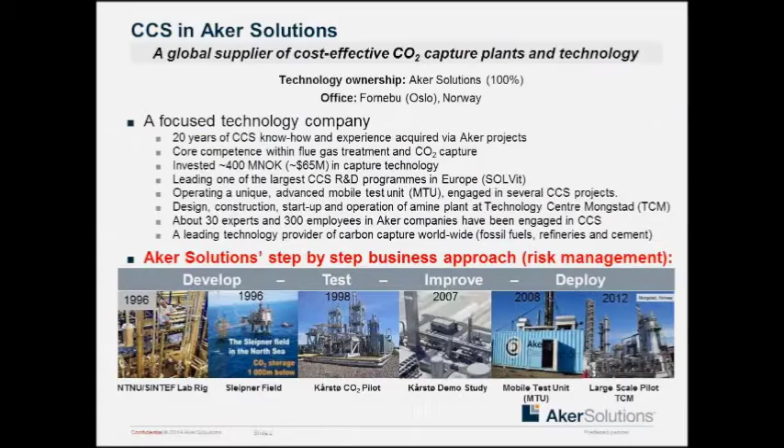First, a summary of our activities. We have been working with CCS in Aker for more than 20 years, and we have an extensive R&D program ongoing to test certain issues related to our post-combustion technology. We also have our own test facility, a mobile test unit operating, which I will come back to. In our company we have about 30 experts on flue gas handling and post-combustion technology. In Aker we have followed this step-by-step approach in order to handle risk.

We started early in 1996 with a small pilot in Trondheim at the university there. Then we did all the conceptual work and design and delivered the Sleipner platform for CO2 handling. Later in '98 we established a larger pilot working on a gas motor. Then in 2007 and 2008 we established a dedicated company for carbon capture, and the mobile test unit, as you can see, was started in 2008. And now we are testing our technology at Mongstad, the technology center in Norway.

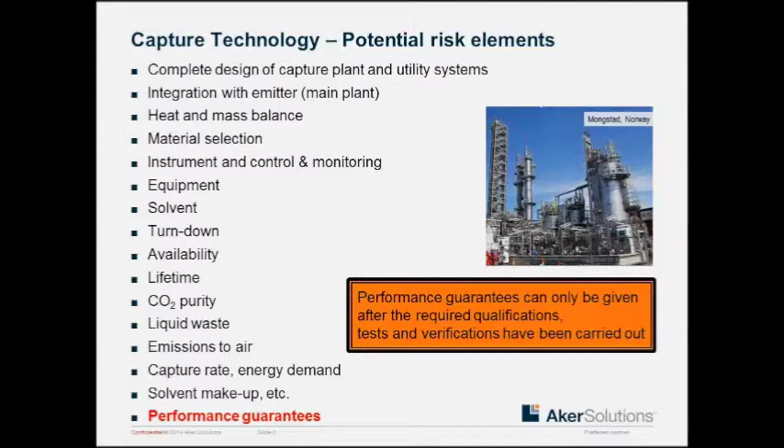To really understand the plant and give performance guarantees, you have to verify the technology and do tests before you can give any process guarantee. That is very important from a technology supplier's point of view.

If you look at the main challenges in the carbon capture plant, it's very much related to the amine solvents. Most technology companies are looking for improved solvents, and they have different behavior with respect to capture efficiency, energy demand, and especially degradation, which is very important if you have a challenging flue gas—then you need a very robust solvent.

Corrosion is very much related again to degradation and flue gas. We have also seen foaming in some systems and operations of the plant. Reclaiming is kind of a washing machine where you take impurities out of the main solvent loop and remove them as waste. Emission to air is also very much related to flue gas and the type of solvent you have.

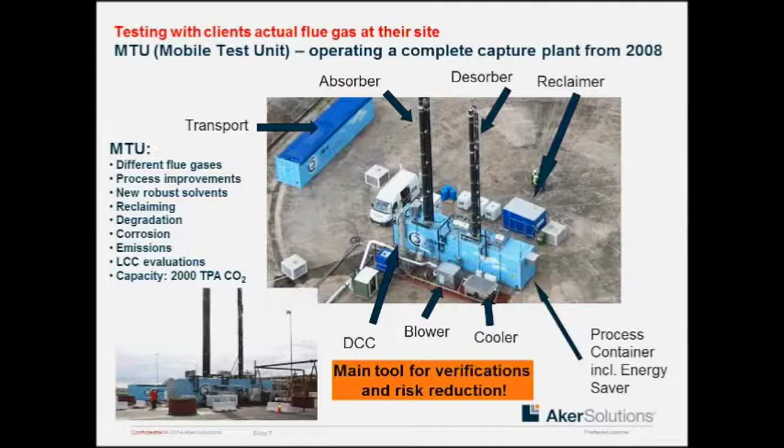You can also see a picture from Heilbronn in Germany, where we have cooperation with ENBW. Finally, the best candidates from these tests enter into Technology Center Mongstad, where we are operating the main plant now. The mobile test units are container-based, easy to move around, and it's a complete carbon capture plant that has been in operation since 2008.

It's very easy to modify, and it's used to verify the performance of the process. We use different solvents, and we can test materials in the plant.

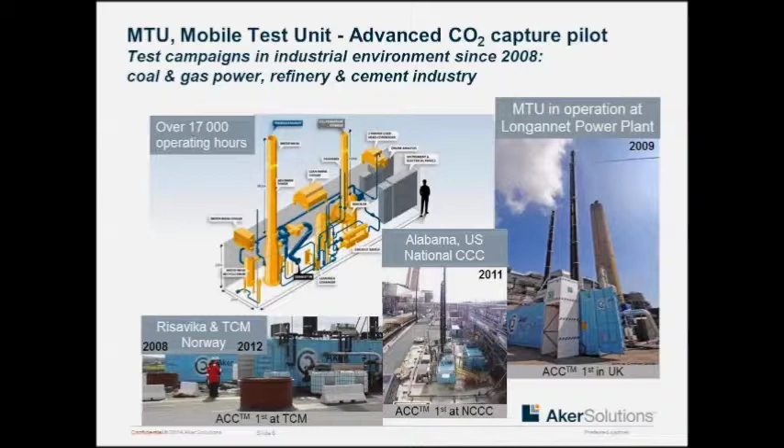This is just a summary of the MTU activities. It's been around in UK, Scotland, and in Alabama, US, and 2 different locations in Norway since 2008. We have different test results from coal-fired power station, gas power station, and at the moment we are testing on the cement factory here in Norway.

As you can see on this slide, we started up on the 1st of May, and we are now testing for the first time on the cement industry. The cement industry contributes about 5 to 6% of the CO2 emission globally, and the CO2 concentration is up to about 20%, so it's high. So it's a kind of low-hanging fruit.

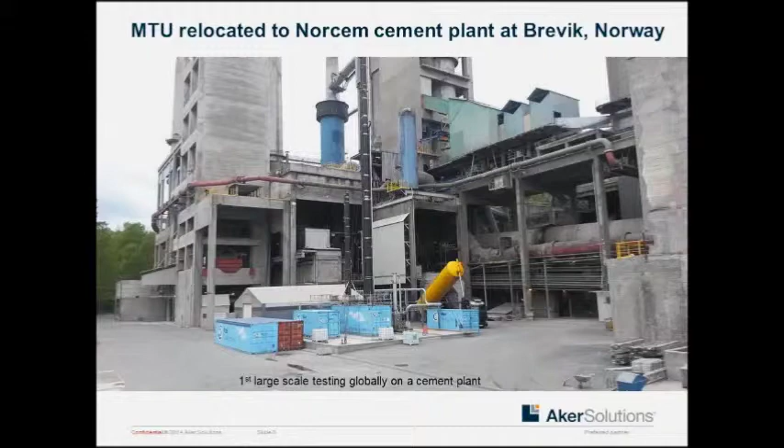But again, it's a different flue gas, different behavior, so it's very important to test on the actual flue gas. Just a summary of the plant at Mongstad.

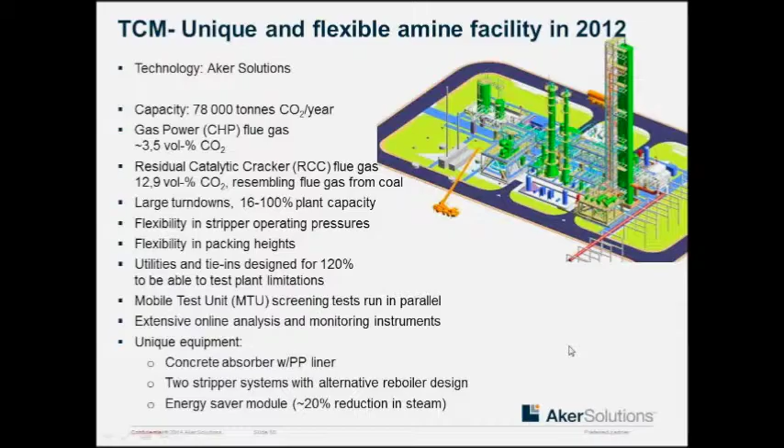Here you see a picture of it - the stripper column, and the absorber here, and you can see the mobile test unit operating in parallel.

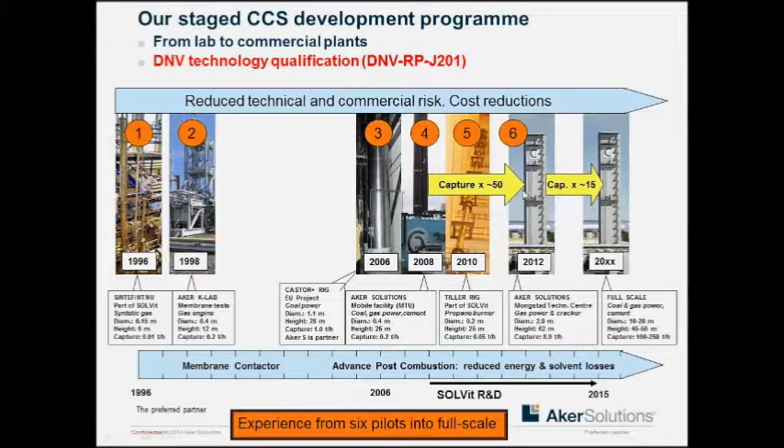Okay, thank you, Oscar. Now I'm going to talk about the procedure that helps manage technical risks in CO2 capture technology. In DNV GL, we call it technology qualification, and Oscar has already referred to that several times.

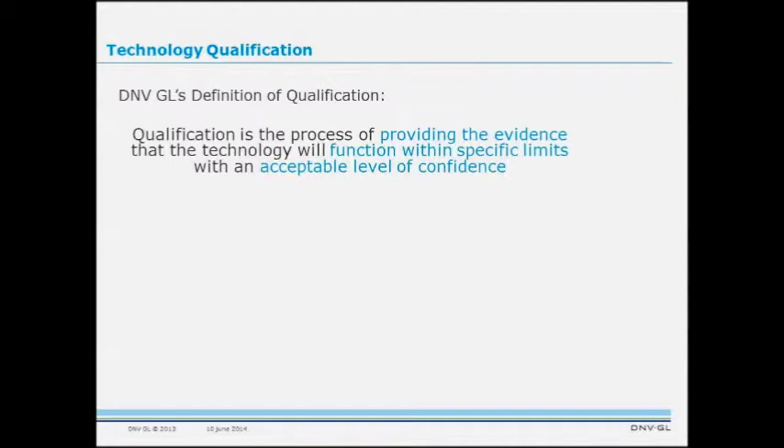Our definition of qualification is that it is the process of providing evidence that the technology will function within specific limits with an acceptable level of confidence. Our technology qualification process helps to increase confidence in the CO2 capture technology among different stakeholders.

Oscar has already mentioned several challenges associated with CO2 capture technologies, probably the biggest one being scale-up. There are also challenges related to equipment and materials, and integration of the CO2 capture plant with the emitter. Introducing new and unproven technology at commercial scale represents technical risks for different stakeholders.

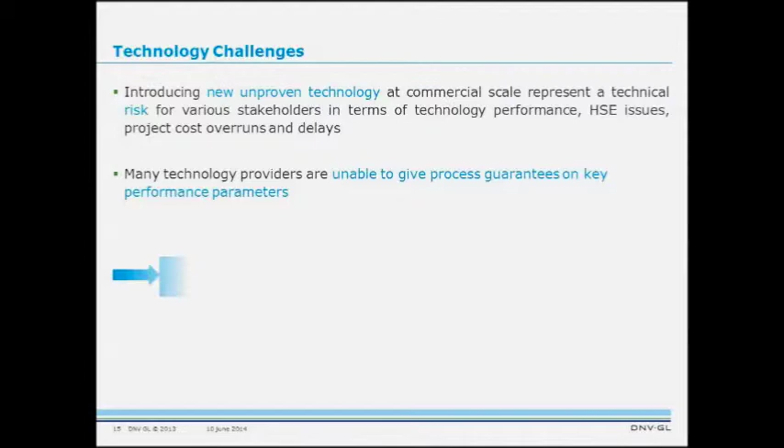Those risks can be related to technology performance, project costs, overruns, delays, and also HSE issues. Many technology providers are unable to give process guarantees on some key performance parameters. So DNV came up with a recommended practice, DNV RP J201, called Qualification Procedure for CO2 Capture Technology, issued in 2010.

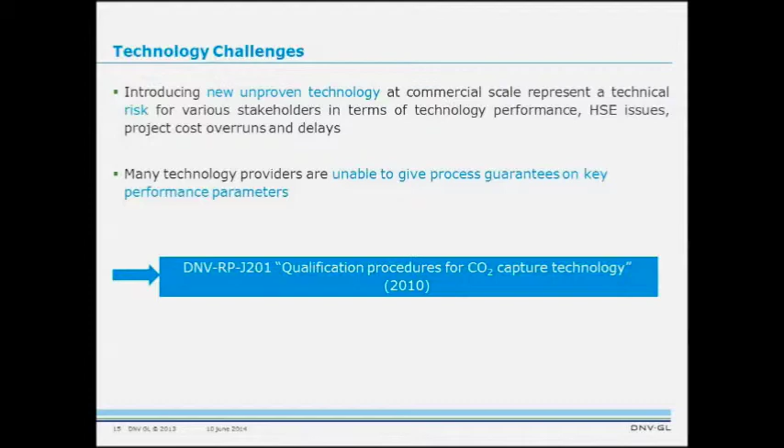Now I'm going to walk you through the steps of that qualification process. Here on the left you can see the DNV RP I referred to earlier, and on the right you can see the steps that the developer has to go through in order to qualify the technology. You can see the process is iterative, so it is possible to go back to the beginning and make modifications to ensure the technology will be successful in the end.

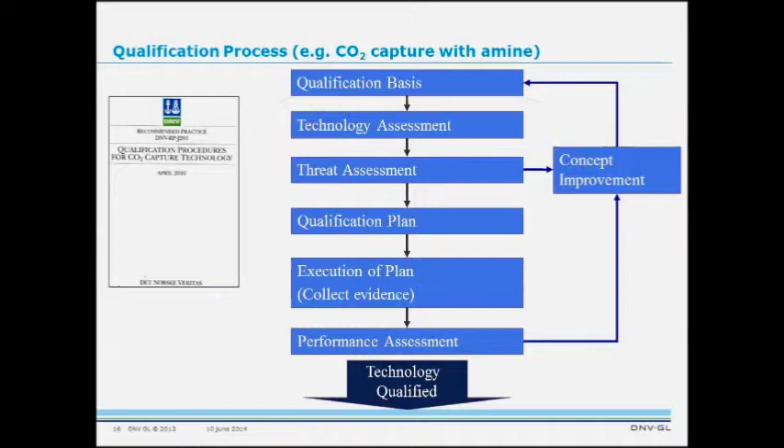The first process is the development of the qualification basis. Here the developer defines, for example, the boundary conditions of the technology and also the expectations for it — capture rate, emissions, energy penalty, reliability, and so on. So this is where the whole process starts.

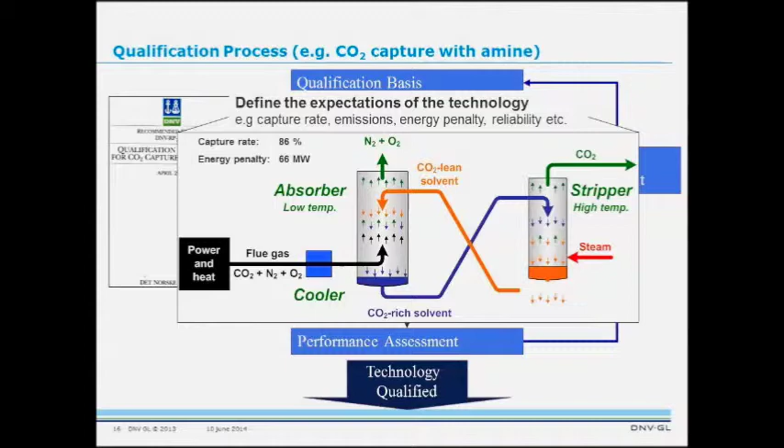After that, the next step is technology assessment. That is where the technology is divided into manageable elements, and these elements are rated in terms of novelty. You can see here the schematics of how we normally do that.

What we mean here is, for example, if you have a pump, and this is definitely proven technology, you would put it here — it is proven. But if you introduce it to a new environment, like putting it subsea or introducing a new liquid, then you would place it here, which makes this element novel.

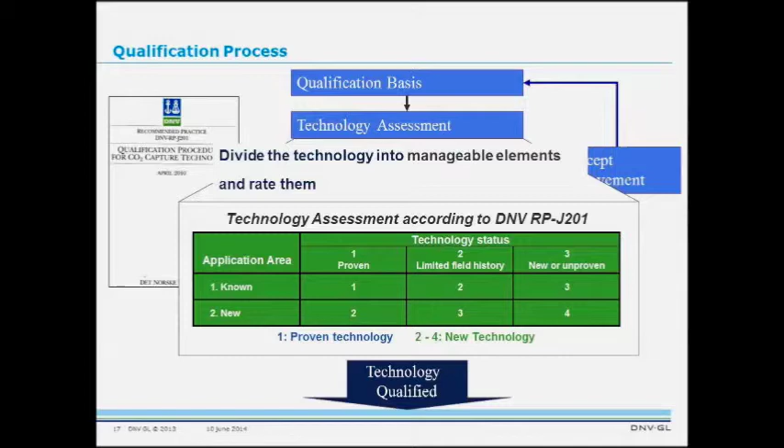So after this step, we have a list of novel technology elements, which we take to the next step, which is threat assessment. In this step, we identify all relevant threats related to the novel technology elements identified in the previous step.

And for all these threats, we try to identify associated risks, ranked high, medium, and low. In the next step, we would take only the threats that lie in the medium and high fields.

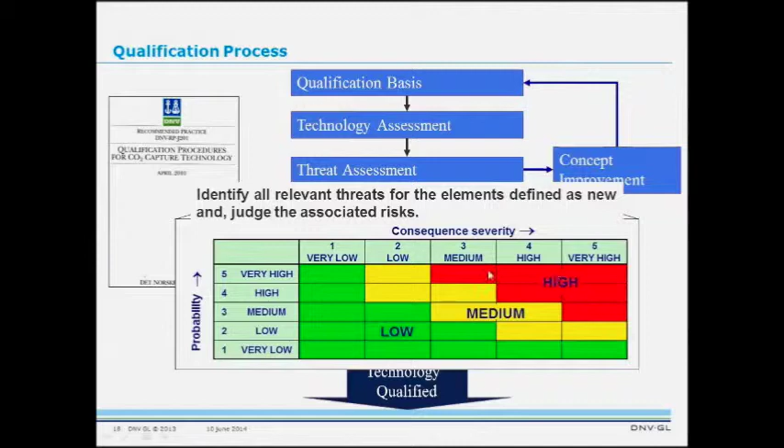The next step is development of the qualification plan. As I mentioned, we focus only on risks that are of high and medium level, and for those threats, we identify qualification activities that can help reduce them to a low risk level.

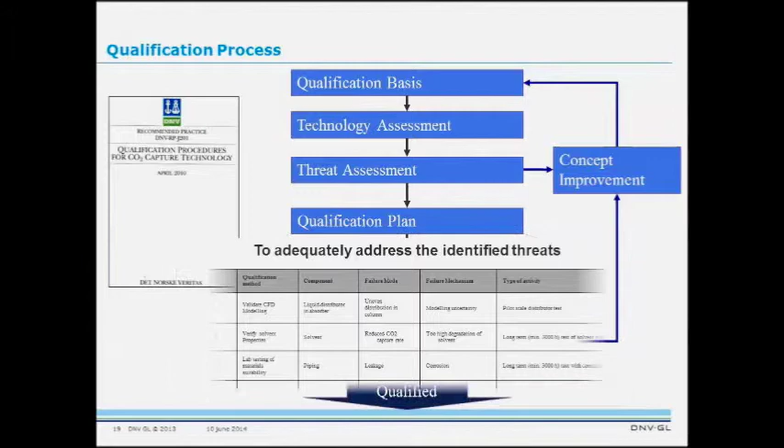The next step is execution of the plan, where we perform all those qualification activities we identified in the step above — this is probably the most expensive and time-consuming step.

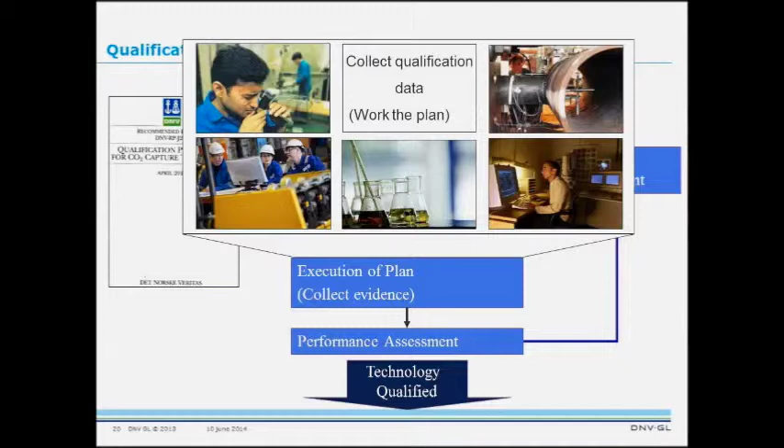In the end, the last step is to confirm that the functional requirements laid down in the qualification basis in the first step of the process are actually met, and that the technology will be successful.

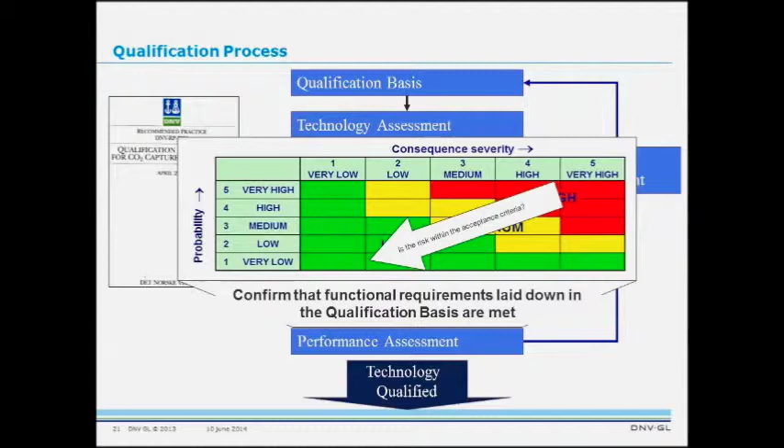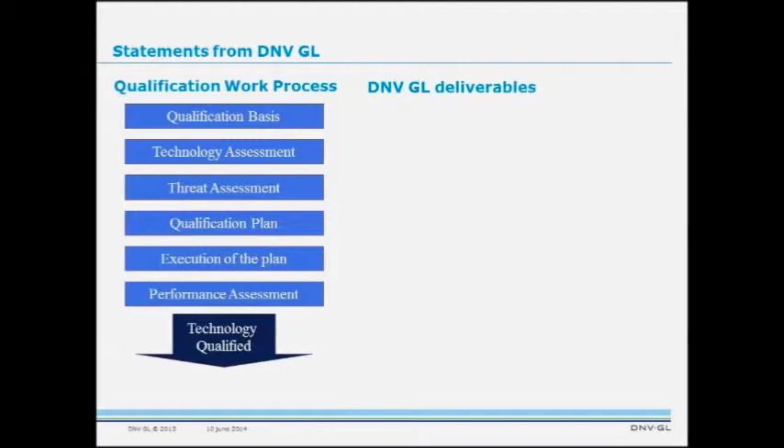Through our qualification process, we also have deliverables from the DNV GL side — three of them: reports, statements, and certificates. The first one comes right after the technology assessment: a technology assessment report and statement of feasibility, showing that there are no showstoppers to the technology.

The next deliverable is the technology qualification plan and endorsement of qualification plan. That certificate states that the technology is executable, and we issue it right before execution of the plan — right before the most expensive and time-consuming part begins.

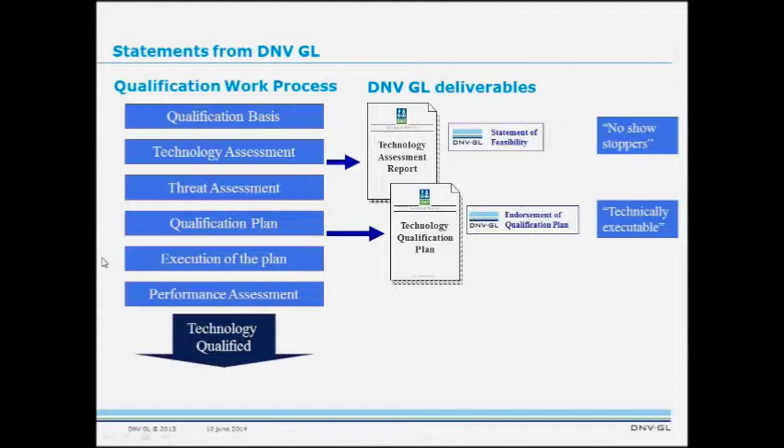The last report is the technology qualification report and technology certificate, which states that the technology is qualified.

To sum up, as I mentioned at the beginning, the risks of introducing unproven technologies can be high, and DNV GL's methodology focuses on addressing high-risk elements. This is important because it helps optimize the cost involved in developing the technology, since we focus only on the high-risk elements. The methodology also ensures that adequate tests are undertaken so that each test addresses an identified risk, and this technology risk management builds confidence in new technologies.

So that brings me to the end of my presentation.